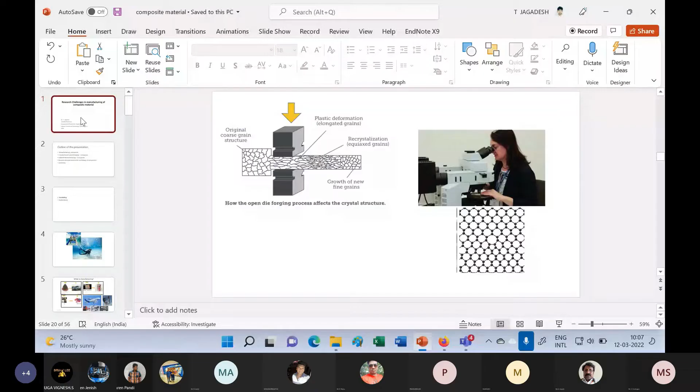Whether my PPT is visible? Visible, Jagadesh. Okay, then shall we start? Okay, started. Carry on.

Good morning to all. Myself, Jagadesh. I am working as a faculty in the Department of Production Engineering from NIT Trichy. Today I am going to discuss research challenges in manufacturing of composite materials.

This is the outline of the presentation. First I'll start with what is meant by manufacturing and what is meant by composites, and how we can manufacture a composite by conventional technique and what challenges are there. Then we'll discuss how we can manufacture a composite by additive manufacturing, followed by macro and micro scale machining of composites. Then the summary.

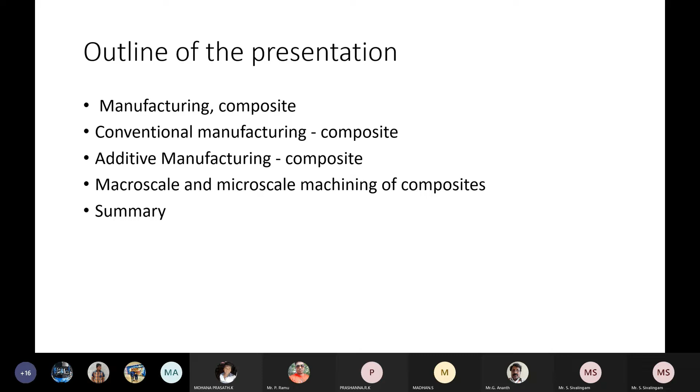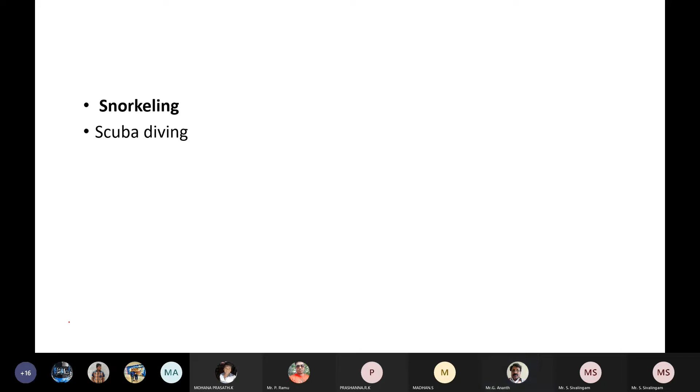Before going to this topic, I would like to discuss two terms: one is snorkeling and the second is scuba diving. How many of you have come across these words? If the students are there and it is interactive, then it will be good. Something connected with swimming - yes, very good. So both are related to swimming activities.

So I am talking about these two things: in snorkeling you can only see the surface of the water, whereas when you go scuba diving you can go deep inside the sea and see what is there in the depth. I am telling these things because whenever you do a project or research on any topic, we need to go in depth - it should not be at a surface level. You have to find out the reason and go for in-depth analysis. That is the point I want to convey from this slide.

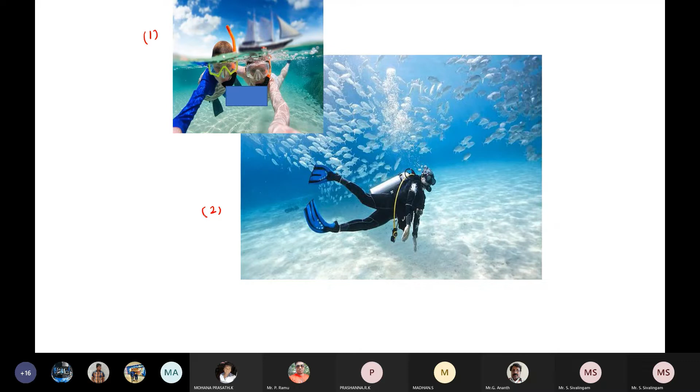Before going to composites, first we'll try to understand what is meant by manufacturing. In simple layman words, can you define how one can define manufacturing? So it is the conversion of raw material into a finished product.

Let us take building an aircraft, or building an automobile, or building any component - a plastic component, a missile, a train, or a machine tool. So all are manufacturing, or building medical components - all these are examples of manufacturing.

It is not a one-step process. It has to undergo several manufacturing processes - starting from primary manufacturing process, then secondary manufacturing process, then assembly and testing, and finally we'll make a product.

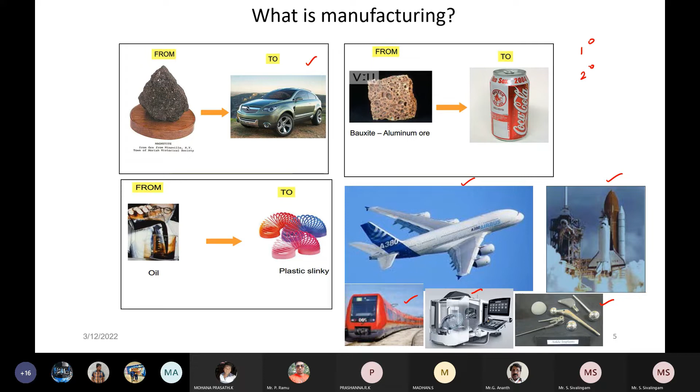So we'll take a typical example of an aircraft and try to understand. Can you guess how many number of parts are there in an aircraft, approximately?

Yes, 40. There are millions of parts. To take a Boeing 777, there are 6 million parts, and I'm talking about each and every small element also. If you consider, there are millions of parts. Each part's material is different, shape is different, size is different, and manufacturing process is different. It's not easy, so building an aircraft is not an easy task.

Only two companies are very famous in building an aircraft: one is Boeing and the other one is Airbus. Because the materials are different, shape is different, size is different, the manufacturing process is different, testing route is different. It's not an easy task.

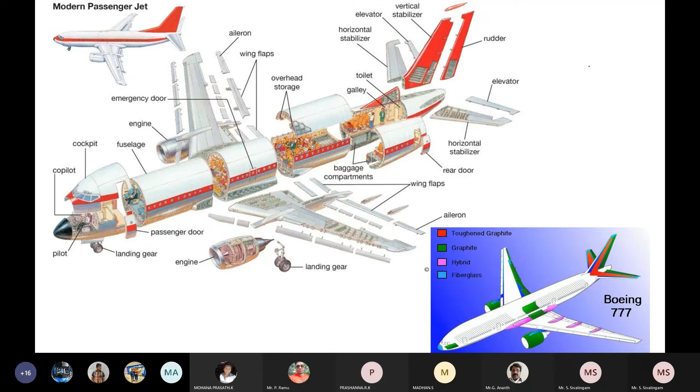So building an aircraft, we'll see in the next few coming slides how composites are widely used, which parts are used, how to manufacture it, and what are the challenges. These are the things we are going to discuss in this presentation.

The scope of manufacturing composites is not only in aircraft, but also automobiles. If you take an automobile, you'll be having 15,000 parts. So now to reduce the weight, they are looking to manufacturing. Suppose you want to increase this property, the beauty of composites is you can play with that.

Whatever properties required, suppose I want to improve the thermal properties, yes, we can build a composite. If I want to improve the mechanical property, improve the creep strength, improve the tensile strength, all those things are possible with the help of composites.

Many have come across this Titanic ship, many might have watched this movie, the Titanic ship failure. This happened because of failure in the selection of material. When the material had a sudden transition from ductile to brittle behaviour, when it hit the iceberg, finally catastrophic failure happened. So why am I telling all this?

Whatever we are developing, finally we need to be safe. Whenever we are traveling in aircraft, automobile, ship or train, we don't want any failure to happen. So as an engineer, as a manufacturing engineer, we need to ensure the quality, and quality plays a very important role. Finally, we need to be safe.

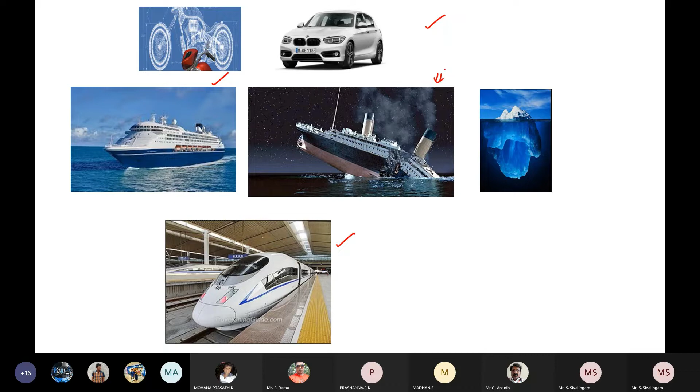So far we have discussed what is meant by manufacturing, and we have seen some application scope in automobile and aerospace applications. Now we'll try to understand what is meant by manufacturing: it is a conversion of raw material into a finished product.

Next, we'll try to understand what is meant by composites. Everybody may be familiar with composites. The composite will be having two constituents: one is matrix and another one is reinforcement. And the property you get in the composite is superior, better when compared with the individual components.

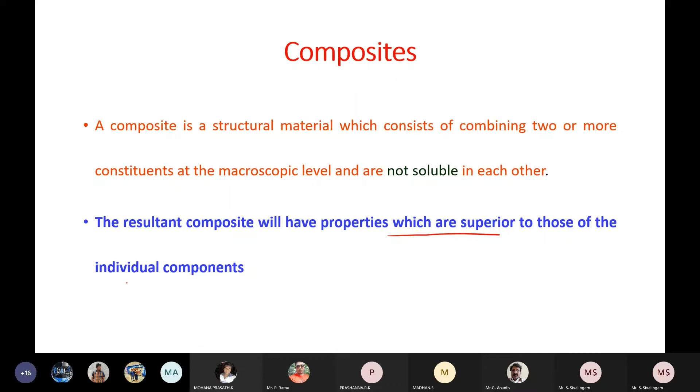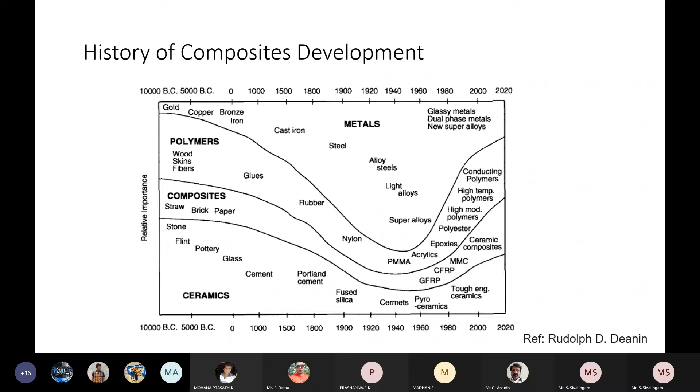So how can one classify a composite? Composites can be classified in three ways based upon the reinforcement and matrix. Based on the matrix, suppose if you take matrix, there are different types possible: either it can be metal, ceramic, or polymer. These are matrix; when you add a reinforcement, then it becomes a composite.

Suppose take a metal matrix, aluminum can be considered as an example. Aluminum can be the metal, and you can add a reinforcement such as silicon carbide or aluminum oxide. Then it becomes a metal matrix composite.

Whereas in the case of ceramic matrix composite, the base, the matrix, will be the ceramics. Then you can add a reinforcement based upon your requirement, if you want to improve the toughness or improve the strength. Then the polymer matrix composite: the base will be polymer, and then you can add a fiber as reinforcement.

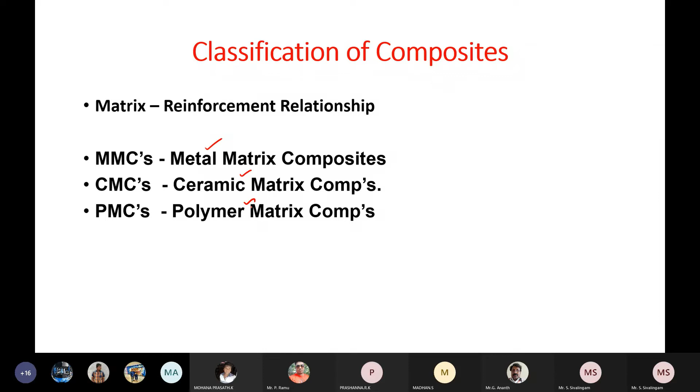Another way of classification is based upon the particle shape. The particles can be laminates, and if it is a laminate, we consider it a laminate composite. If it is a fiber, it can be a fiber composite, either continuous or short fiber. If it is a particle, we call it a particle composite, flake composite, or filled composite. So based upon the shape of the constituent you choose as matrix or reinforcement, we can classify in this way also.

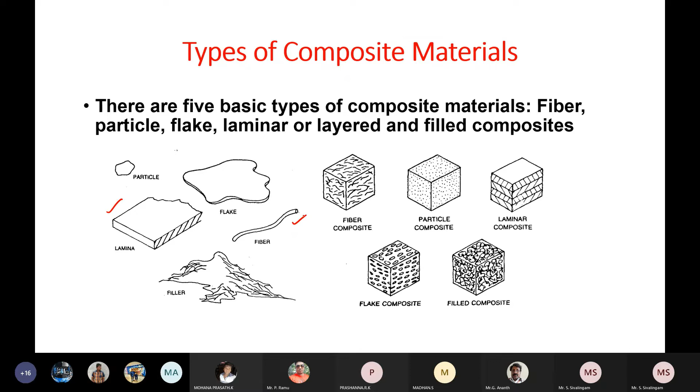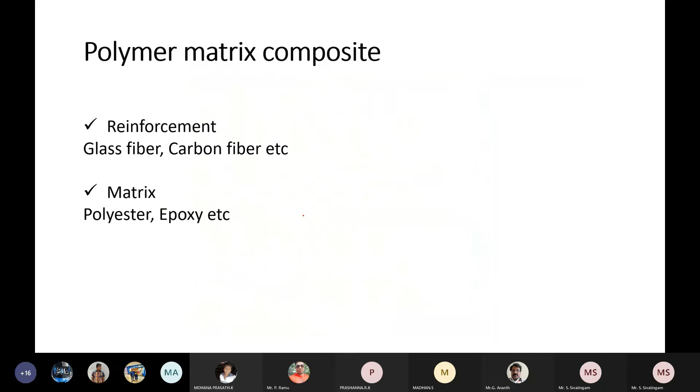In polymer composite, the base matrix is mostly polyester or epoxy, and then we add a reinforcement. A lot of research has been done on reinforcements like glass fiber and carbon fiber. Before developing a composite as an engineer, we need to understand the basics.

Starting from scratch, we need to understand how the structure determines the properties. The properties of a material mainly depend upon the structure. In metals, we have BCC, FCC, HCP structures. Similarly, in polymers, if you take a polymer matrix composite, you need to understand the structure, whether it's a polyester, epoxy resin, or any other matrix.

As an engineer, one should not go straight for an experiment. You need to start from the basics, from the fundamentals, to understand how the strength has been improved. So let us define polymers.

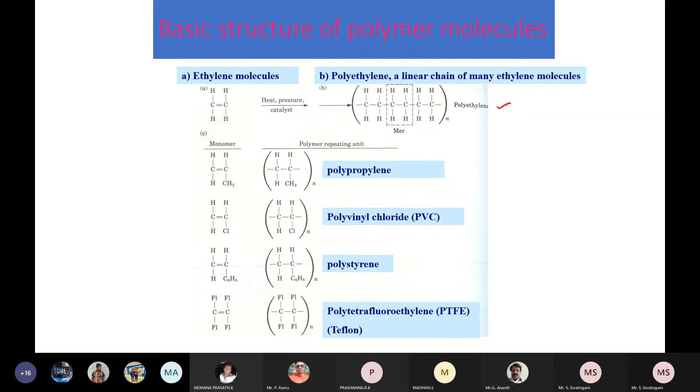When monomers combine together, it becomes a polymer. Polymers again have different classifications, like polypropylene, polyvinyl chloride, polystyrene, polytetrafluoroethylene. These are all examples. Now, looking at the different structures, how can one say which will have more strength and which will have less? It depends upon the structure.

Just like metals have FCC and BCC, here too we have different structures. The linear and branched structures have less strength. When the structure becomes more complex, like cross-linked and network structures, the strength improves. This has to be understood before choosing the matrix.

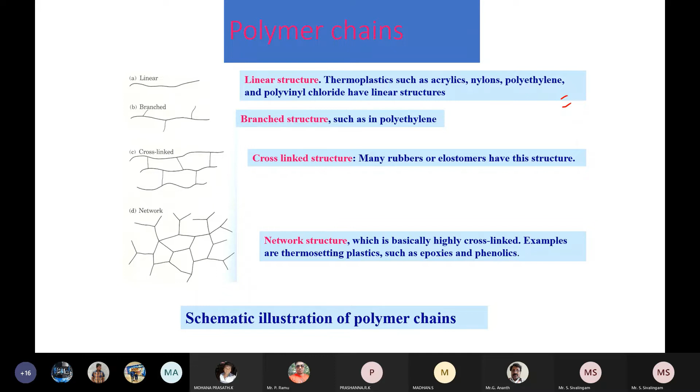Then comes reinforcement. A lot of research is happening here. In polymer matrix composites, they add carbon fiber, glass fiber, or Teflon fiber. Now they are also adding more natural fibers. There is a lot of scope and a lot of work being done, but instead of going for experimentation with all composites, which is highly expensive...

One can start with modeling and try to understand the physics of the process, then go for an experiment. This makes research more useful. This understanding has to be given more importance.

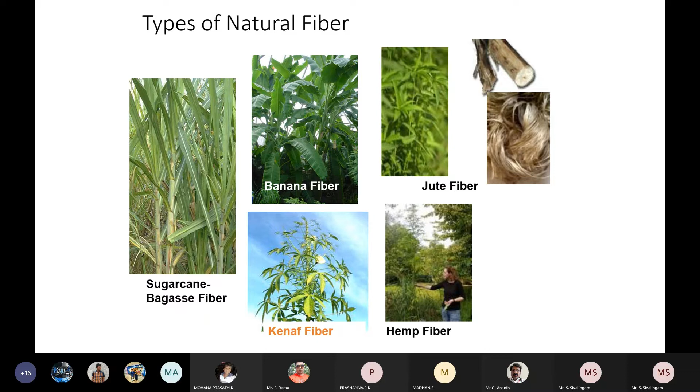You can add any natural fiber, but if you consider natural fiber alone, the strength will not be good. So one can add natural fiber along with other fibers like carbon fiber, so the strength will also be good while still using a natural fiber.

Once you add this reinforcement, either a natural fiber or a common fiber like carbon fiber or Kevlar fiber, you have to find out the strength. This is the first step one has to do, and a lot of research has gone into this.

You need to find the strength of the fiber and the strength of the matrix. When you add them into a composite, the resulting strength depends on what type of fiber and what type of natural fiber is used, so this has to be very clear. What will be the yield strength, the ultimate strength, the fracture strength? These are the properties one has to analyze after manufacturing a composite.

So far we discussed polymer matrix composites. You have a base polymer, and you can add any reinforcement, either natural fiber alone or natural fiber along with carbon or other fiber. Once the composite is made, you have to test it to find the strength when adding a natural fiber, depending on what volume percentage or weight percentage is added, and how much strength results.

So this experimentation is always expensive. The challenge is one can develop modeling instead. So either you can go for a finite element model, or you can go for some analytical model and then try to understand the physics of the process. Then if you go for manufacturing, it will be more useful.

So the next one is metal matrix composite. What are the challenges there? So far I'm talking about all conventional manufacturing. Later we'll discuss additive, advanced manufacturing, and then secondary manufacturing. These are all the primary ways of manufacturing process.

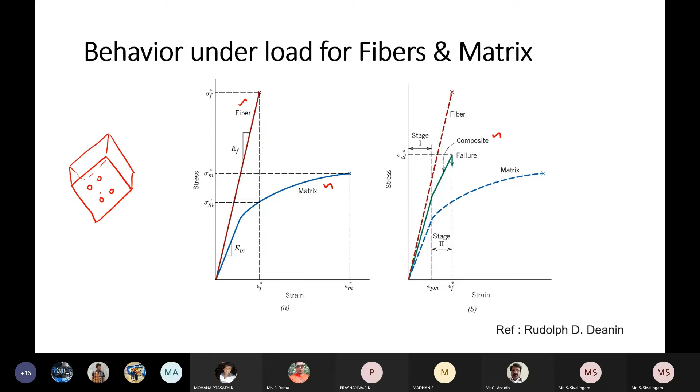Suppose you want to build a component with some holes or complex shapes. It's not an easy task using a conventional manufacturing process. Suppose you want to manufacture a component where holes have to be there, it's not an easy task. So then you have to go for a secondary manufacturing process. Primary manufacturing alone cannot make these complex features as well as micro features, so for that we need to go for a secondary manufacturing process as well.

So next we'll try to understand what is metal matrix composite. In metal matrix composite, your matrix will be a metal, and the reinforcement we can add as silicon carbide or aluminum oxide.

Before going for metal matrix composite, first you will pick an element from the periodic table. You have studied these things in school about the periodic table, there are 118 elements. Before choosing a matrix, one has to look into what will be the atomic number and mass number. We need to understand from the structure, from the atom level, because we are adding the reinforcement, and we need to see how these two materials interface. So all those things we need to understand.

So the basic process in metal matrix composites is casting. Everybody will be very familiar with casting. You create a mold cavity, melt the material, pour the liquid metal inside the mold, and allow it to solidify. Finally we'll get the cast component. So it's very clear in this process.

But when you are adding a reinforcement like silicon carbide or aluminum oxide, the problem is it should be uniformly distributed in the matrix. For that, a lot of research is going on, and one can look into simulation also, because experimentation is always a challenge and difficult. So before going for experimentation, you can do this casting simulation also. There are some softwares available where you can actually create the matrix and the reinforcement, and do the simulation also.

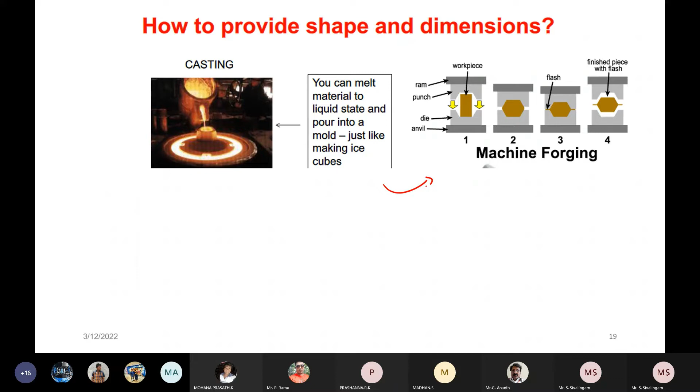We are all very familiar with the Hall-Petch equation, where sigma y is equal to sigma naught plus k divided by root of d. So when the grain size is getting reduced, the strength will be getting improved. In composite, after making the composite by casting process, you can go for further deforming of the material, and then you can introduce a fine grain. Fine grain means the strength will be high.

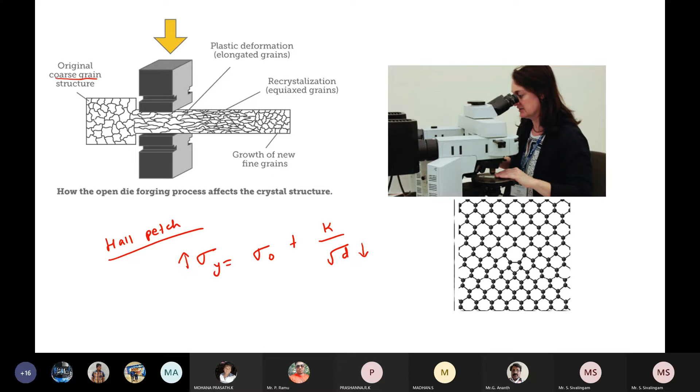But this will be good only at room temperature, this fine grain is good only at room temperature. When the temperature increases, we need to choose a coarse grain. Normally in aircraft gas turbine blades and all, it will be made of a single crystal material, because fine grain will not be good for high temperature. This is good only for room temperature application.

So the next question will come: whether all the materials, suppose you take a periodic table, whether all the materials can be castable. Can we cast all the elements here, whatever you are seeing in the periodic table, whether all the materials can be castable? If any students are there, you can respond. Yes, all the materials we cannot cast. Why?

If the material has a high melting point, we cannot go for a casting process. Suppose it's 2000, 2500, or 3000 degrees Celsius, like refractory metals such as tungsten, molybdenum, vanadium - those materials we cannot cast, because there is no furnace available in the world to melt a material up to that temperature. It will be difficult and highly expensive, so then they will go for a powder metallurgy process.

So we should all be familiar with powder metallurgy. But what are the challenges in powder metallurgy? The basic step is we need to produce a powder. So how to produce a powder?

There are different elements to consider. If we go to the periodic table, we cannot choose just one process, since there are 118 elements. There are n number of processes available - atomization, and within atomization you have gas atomization, water atomization, and different gases involved. There is also ball milling.

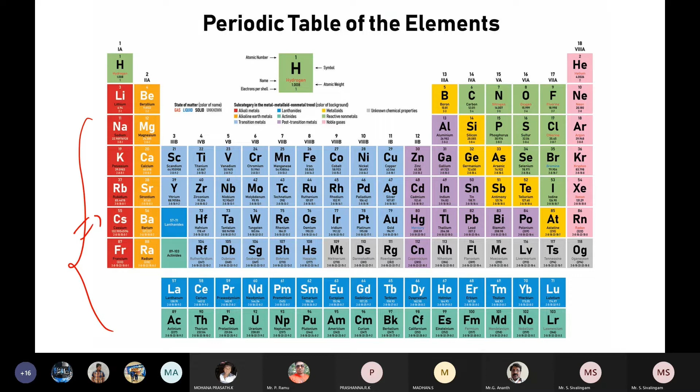First is selection of metal powder, and then selection of the metal powder production method. Once you produce the powder, the next challenge is you need to design a die, because when you are removing the compacted specimen, the specimen should not break. So we need to have it properly designed.

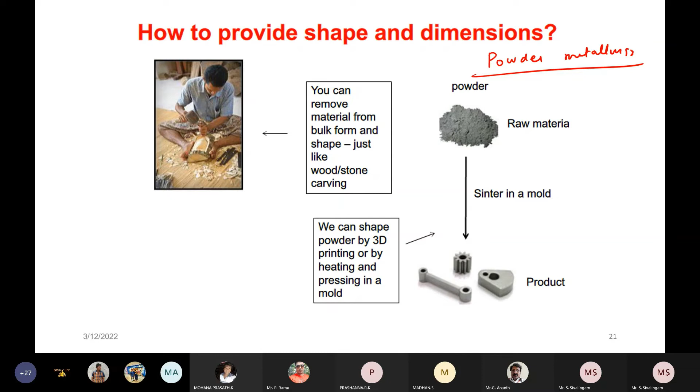Then we need to go for sintering. Again, advancement has happened in sintering - in early days they used conventional sintering, then microwave sintering, and now they are going for spark plasma sintering where you can improve the properties. Basically, in the sintering process, bonding happens between the particles. So there is a lot of scope in powder metallurgy also.

So far we have discussed the conventional way of making components, which we are very familiar with: polymer matrix composite, metal matrix composite, and ceramic matrix composites. Next, in a few coming slides, I'll show the applications so that you will really appreciate the importance of composites. You can see normal musical instruments or sports instruments - easily you can manufacture these with the help of a composite.

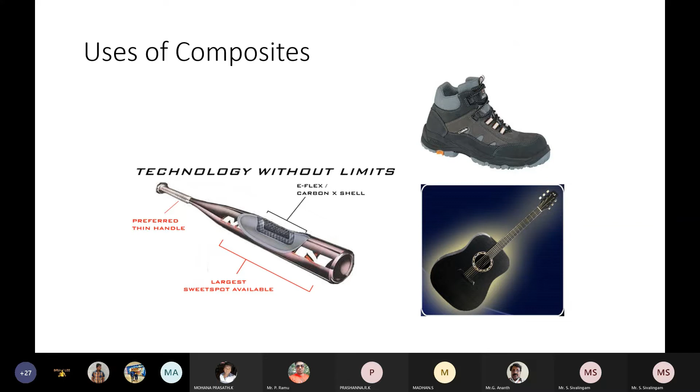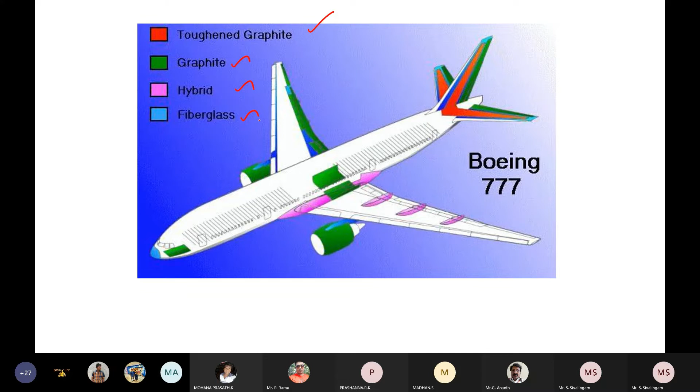You can see in the defense industry also we use these composite materials, with different fibers, and based on that the components are not the same. That is what I told earlier - each component, the material will be different, shapes and sizes, and the processing route will be different.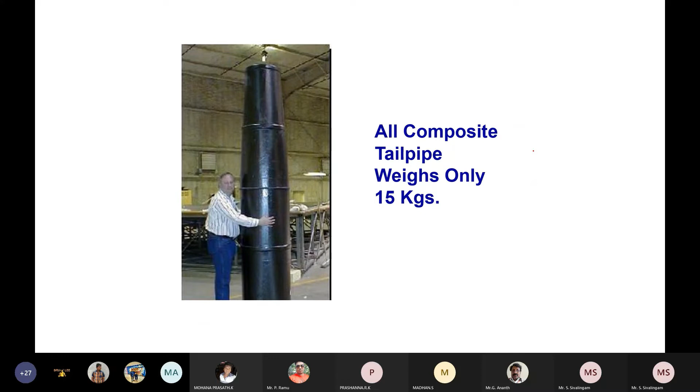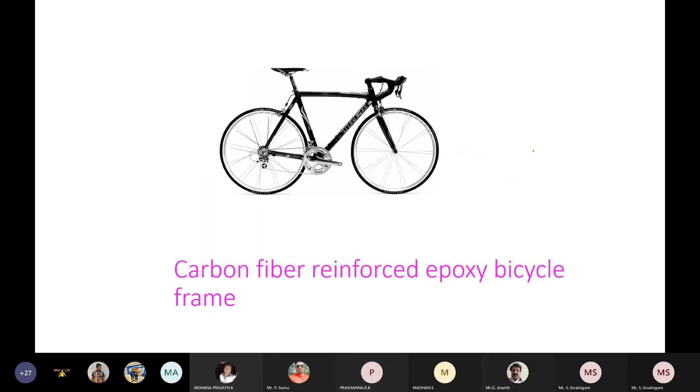Constructions, medical applications also - you can make these by composite processes, and sports applications. You can see the cycles, and the musical instruments. So all those things are made by composites. You can also see the furnitures.

So far we have discussed the conventional way of making a composite and its applications. So far I have discussed what is meant by manufacturing, what is meant by composites, and how we can make polymer matrix, metal matrix, and ceramic matrix composites, and their applications. So next we'll move into additive manufacturing - we are all familiar, I guess, with additive manufacturing.

It's not a new process, it's a layer by layer making process. The beauty of additive manufacturing is that we can make complex features, whereas in conventional manufacturing we need to prepare a mold, so making complex features, whether in polymer or metal matrix composite, is difficult. In additive manufacturing, the beauty is we can make complex features. The process is like 3D printing, making a component by a layer making process.

Here we have three types of classification: one is stereolithography process, the second is fused deposition modeling, and the third is selective laser sintering. This additive manufacturing is classified into three types based upon the raw material used.

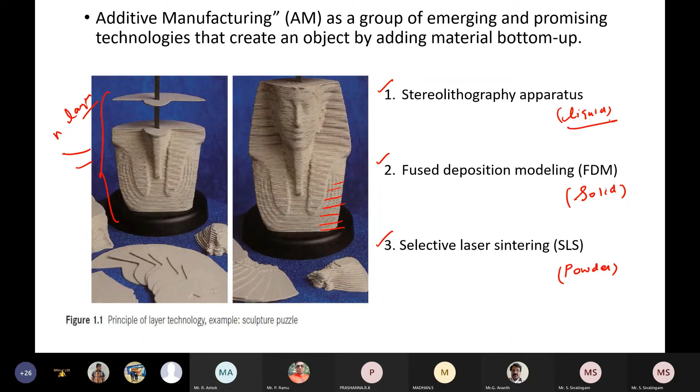This is the stereolithography process, where the raw material is in the form of a liquid - you can see here it is liquid. Here also one can go for building a composite material, so by properly designing you can build a composite.

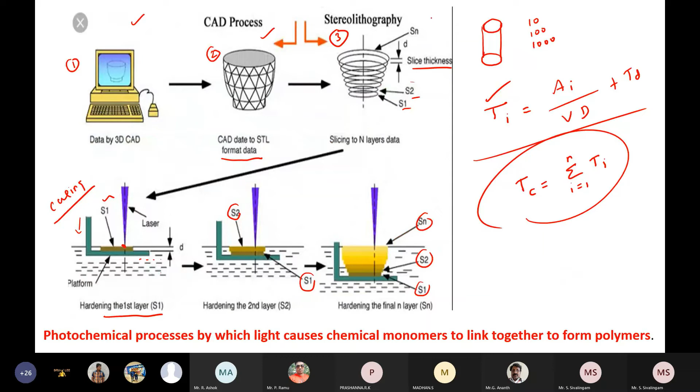The next process is fused deposition modeling, where the raw material is in the form of a solid - you can see here the raw material is solid. Here also we are going to print layer by layer, so the methodology is the same. These first 3 steps are same for all processes: first you need to build a 3D CAD model, then convert that into an STL file, then decide how many layers you are going to print.

So you can see here the fused deposition modeling - there are 2 spools. One can be used as a matrix, another can be used as a reinforcement fiber. With the help of this, you can see the feedstock - the raw material is in the form of a solid, normally in the form of a wire. These wires have guide wire rolls, with the help of which we can feed the matrix and reinforcement inside the nozzle.

In the nozzle there will be a heater. This heater will melt the solid and then deposit it layer by layer. You can even print multi-material also - one material may be A, the other material can be B. Like that, it is possible to develop composite materials. So this is one type of technology where the raw material is in the form of a solid.

Again, here also there are a lot of challenges. What will be the layer thickness? What will be the orientation? Suppose you are building one layer A and then the other layer above that - what will be the orientation? Whether the orientation is 0 degree or 90 degree or 45 degree, at what orientation you are going to print - based upon that, your properties will vary. So there has already been a lot of research done, and it is still going on for printing multi-material and composite materials.

Next is selective laser sintering, where the raw material is in the form of a powder. It's also possible to develop a composite material with this technique, which is similar to powder metallurgy. In powder metallurgy, you prepare a powder, compact it with a die and punch, then sinter it to get a component.

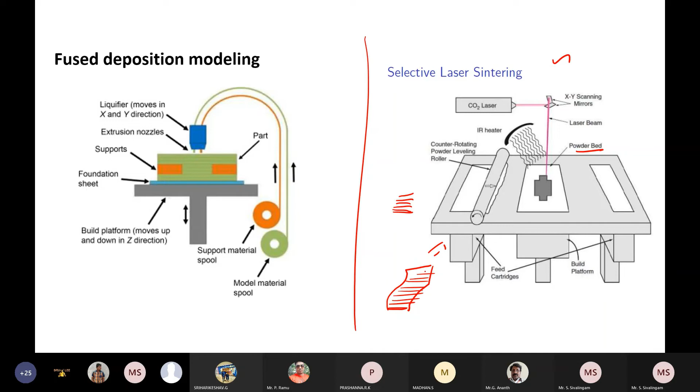So far we've discussed conventional manufacturing and additive manufacturing as advanced processes to develop composite materials. The next important point, mentioned in the first slide, is that when developing a product, raw material is not converted into a finished product in one step - it has to undergo primary and secondary manufacturing.

Normally machining is a secondary manufacturing process. So why go for machining? The main objective is to get good surface integrity and a good surface finish.

But machining is not an easy process. It's a complex manufacturing process where the tool and workpiece interact at high speed, causing the material to deform elastically and then plastically. The energy consumed in plastic deformation becomes heat energy, which has to dissipate - there are many challenges involved.

When building a composite material, whether a metal matrix or ceramic matrix composite, by any technique - conventional or additive manufacturing - you will not get good surface integrity. Every functional surface requires a good surface finish, which is not possible with conventional or additive methods alone. We have to go for machining, removing at least a small amount of material to get a good surface finish. This can only be done with the help of a machining process.

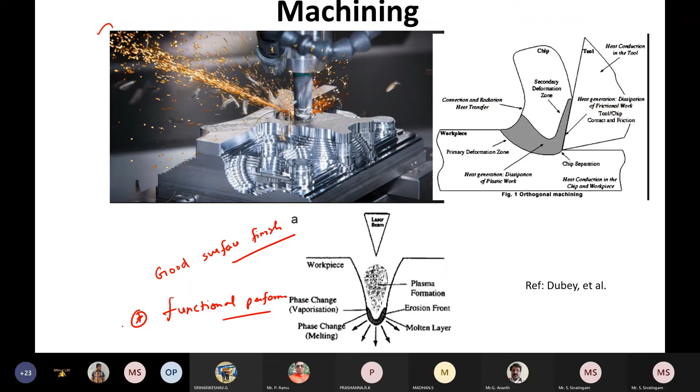But what challenges are there? First, building the machine tool itself is a challenge. Let's take a 3-axis CNC machine tool - there are 21 errors present. Everybody thinks that once you have a machine tool with a cutting tool, you can simply do machining, but it's not like that. We need to understand in depth what errors exist in a machine tool.

Suppose you have a 3-axis machine tool where the table moves in the x-axis - you will have horizontal straightness error and vertical straightness error. Macroscopically it looks like the table is moving perfectly fine, but when you measure it with a laser, you find errors in horizontal, vertical, and straightness.

There will be 3 linear errors. If you consider one single axis, we'll be having 3 linear errors, and also it will act as a form error. So roll, pitch, and yaw.

If you closely observe, if you keep some angular sensor and encoder and then measure, there will be an angular form error also. So in each axis, you'll have 6 errors, like 3 linear errors and 3 form errors. You'll be having 3 axes, so 6 into 3, you'll be having 18 errors.

In addition to that, there will be a squareness error between the 2 axes. There are 3 such axes, so there will be 3 squareness errors. So totally there are 21 errors possible.

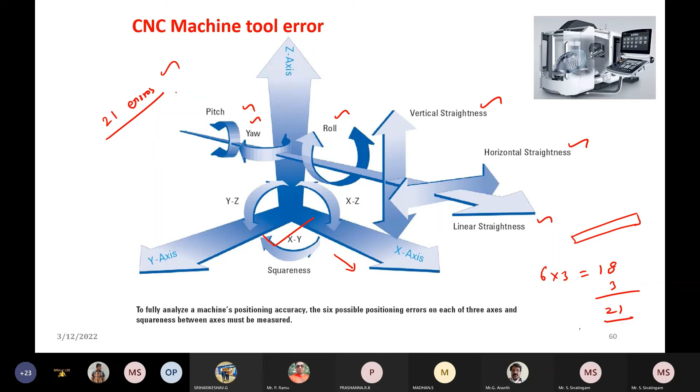These things have to be understood before choosing a machine tool. First you have to understand how many errors are there and how we can minimize them. There is a lot of research going on about how we can minimize this error. We cannot make it zero, but we need to minimize as much as possible.

So once you have a machine tool, now you understand the difficulty in developing a machine tool and the difficulty in manufacturing a composite. Next you go for machining. When you go for machining, you need to understand in depth how the material is removed.

Suppose you developed a metal matrix composite. With the help of some cutting tool, you do a machining process and get the finished component. But as an engineer, you need to understand what actually happens during the machining process - what is the mechanism of material removal?

Now people are talking about micro machining also. So what is the difference between macro machining and micro machining? Any guess? Micro machining means you will be removing material or generating a feature size in terms of microns. Suppose you take any polymer composite - you cannot create a feature in terms of microns or nano level, so again you have to go for a secondary manufacturing process. So what is the difference between macro machining and micro machining?

In macro machining, the material removal mechanism is - you can see here, this is the workpiece material, and this is the cutting tool. After developing a metal matrix composite, you will be looking for a good surface finish, so you go for machining. When the tool interacts with the work material in macro machining, you can see the failure happening along the grain boundary. Normally only the grain boundary will be weakened, so when the tool interacts with the work material, the shearing happens along the grain boundary.

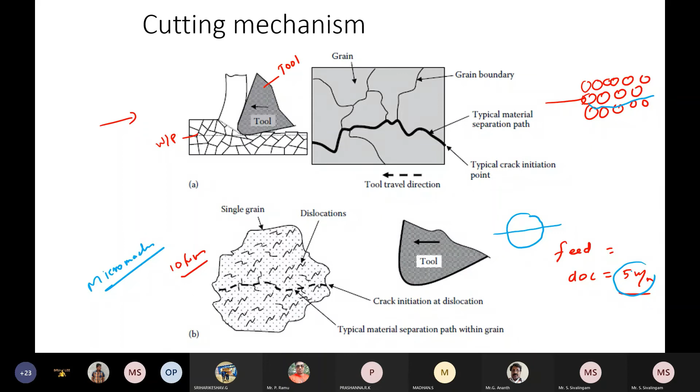There will be one more issue. We do not know whether the material will be removed or not, because here the process parameters will be in terms of microns. Are you able to imagine microns? It will be 1 or 2 micrometer feed or depth of cut. We don't know whether the material will be removed, but the basic objective in machining is you need to remove the material, the chip has to form.

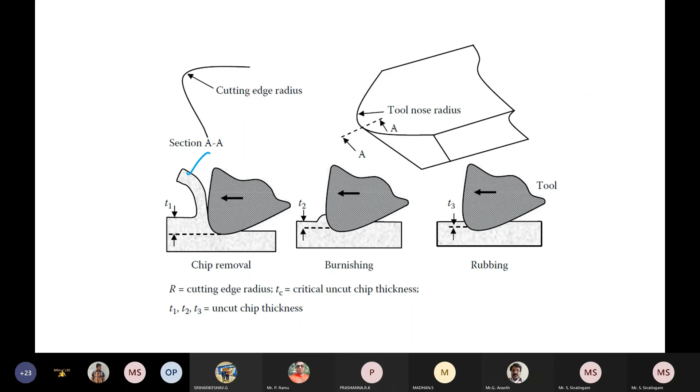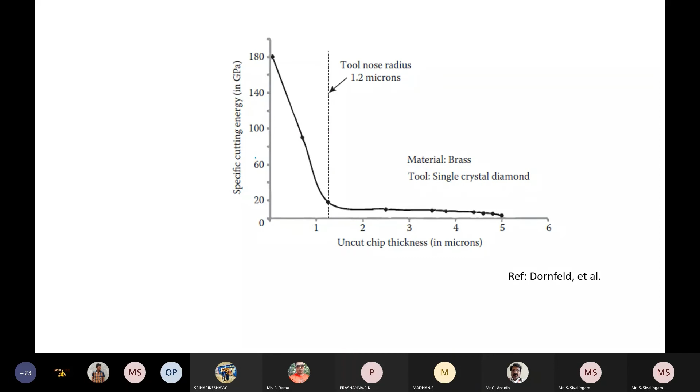But when you go for micro machining, when the tool edge radius is comparable to the process parameter, the material will not always be removed. Sometimes burnishing or rubbing will happen instead. Because of that, the specific cutting energy will be high for low uncut chip thickness. When the tool edge radius is comparable to the uncut chip thickness, the specific cutting energy will be very high. So this is a challenge—it's not easy to micro machine any conventional or composite material.

One more technology, with this I'll complete. For such complex metal matrix composite or ceramic composite, if you want to process it and generate a good surface finish, you can go for laser. You can use the laser to preheat the material and then remove it, because removing the material by conventional machining of metal matrix composites or other materials is highly difficult, since tool wear will occur. Once there's tool wear, you will not get proper surface integrity of the work material.

So there is a lot of research going on to improve the surface, because the final objective is to get a good surface finish, even for conventional or composite material. You can use a laser to focus just before removal of material—focusing at a particular point, then with the help of a cutting tool, we remove the material. The advantage is, once you heat it, the material gets softened, and then you can easily remove it with the cutting tool. That is the advantage of this laser assisted machining process.

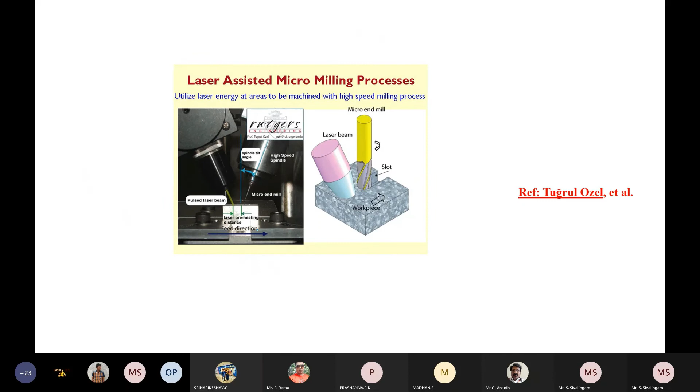This can be done at a macro level, but at a micro level it's again a challenge, since the component size will be very small, in terms of 10 or 20 micrometers. How will you focus and perform this micro machining is always a challenge. Scientists and researchers are interested in laser assisted machining because of the total cost—they are not only interested in improving quality, but if you go through this process, you can see a drastic reduction in cost.

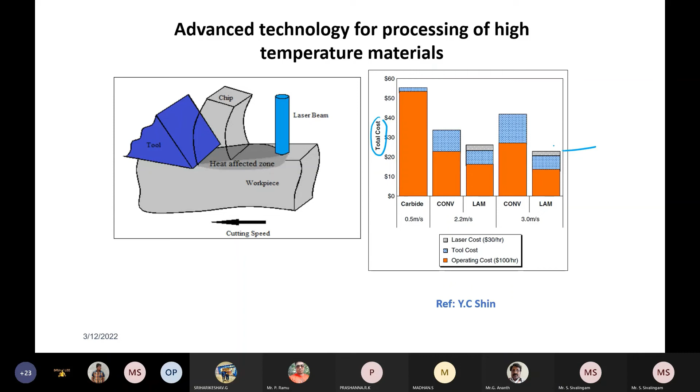That's why they are interested in this. This technology can be used not only for conventional material but also for composite material, to improve the surface integrity of the material.

So, Sivalingam sir, how much time is there? Shall I conclude?

Yes, carry on, Jagadish. Yes.

There will be one more topic, I'll discuss this and then we can summarize the discussion. There is one more topic called wettability. When you take a composite, so far we discussed how we can manufacture a composite by conventional methods, and then by additive manufacturing technology. Then we discussed machining, because machining is important to improve the surface integrity of the material—how we can do machining at macro level, what are the challenges, and at micro level, and then how we can use laser technology to improve the surface finish of the material.

So the next topic I would like to discuss, with this I'll complete. What is meant by wettability? It's very important because when you choose a matrix and the fiber as reinforcement, the interface has to be good.

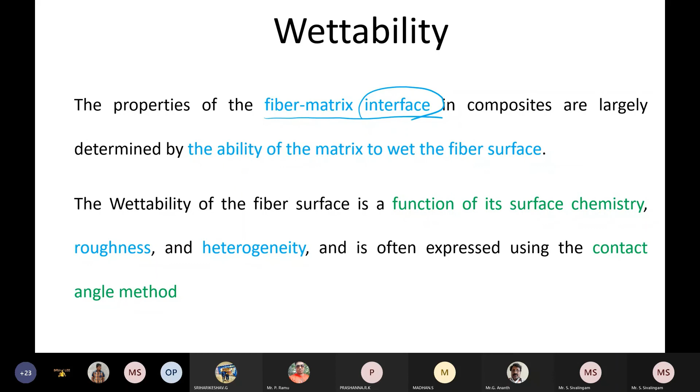So how to check before one randomly chooses a matrix material and fiber reinforcement before developing a composite. The properties of the fiber-matrix reinforcement interface play a very important role. So how do we check the wettability, how do we find out the wettability of matrix and composite material? There is one well-known method that many industries follow.

Suppose I want to check the wettability, and I am going to print a multi-material like a composite, material A and material B. First we need to understand what will be the wettability of material A, and then in depth the wettability between these two materials. This test is called the wettability test. I think some of you may be familiar with it, so I'll explain how it can be done.

First we choose one material, material A. Then we take material B and melt it, and once melted it will become liquid. When you increase the temperature, after reaching the recrystallization or melting temperature, it becomes a liquid, and you pour one droplet of this liquid over metal A.

So metal A I have taken as it is, and metal B I have melted and poured as a drop of liquid. Once poured, you allow it to solidify, and it also becomes a solid. So material A is taken as it is, material B is melted into a liquid, and one droplet of liquid metal is poured over metal A and allowed to solidify. After solidification, we need to check what will be the wetting angle.

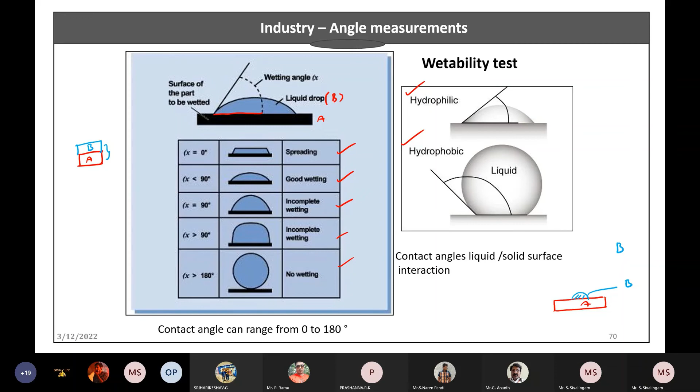So it's very important to perform and understand the wettability between two materials before going for manufacturing, choosing any material. With this, I'll summarize.

We started by trying to understand what is manufacturing, then what is meant by composite, then we saw the applications of composite in aerospace, automobile, ship industry, and medical industries. Then how we can manufacture a composite conventionally, which we are very familiar with, using polymer matrix, metal matrix, ceramic matrix, and how it can be done with additive manufacturing. In additive manufacturing, we discussed three techniques: stereolithography, fused deposition, and selective laser sintering. Then we discussed machining.

Why do we need machining? To get better surface integrity, and to understand how the material is removed at the macro level and micro level. One has to look more into modeling and simulation, since composite material is a highly complex process. The properties are not isotropic, they are anisotropic. So to understand these processes, it's always advisable to start the work with modeling and simulation, understand the process physics, and then we can go for manufacturing any material, whether multi-material or composite.

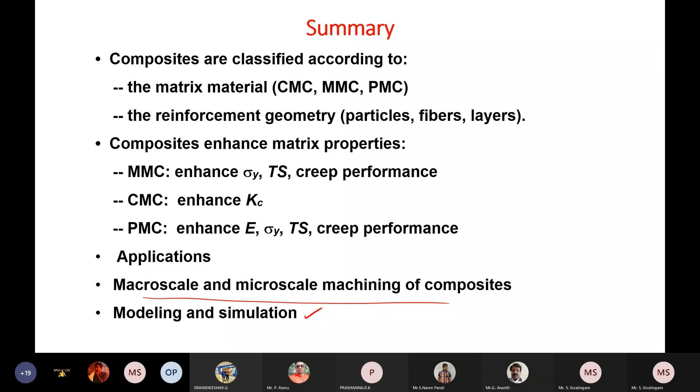With this, I'll complete this. If there is any doubt, we can discuss now.